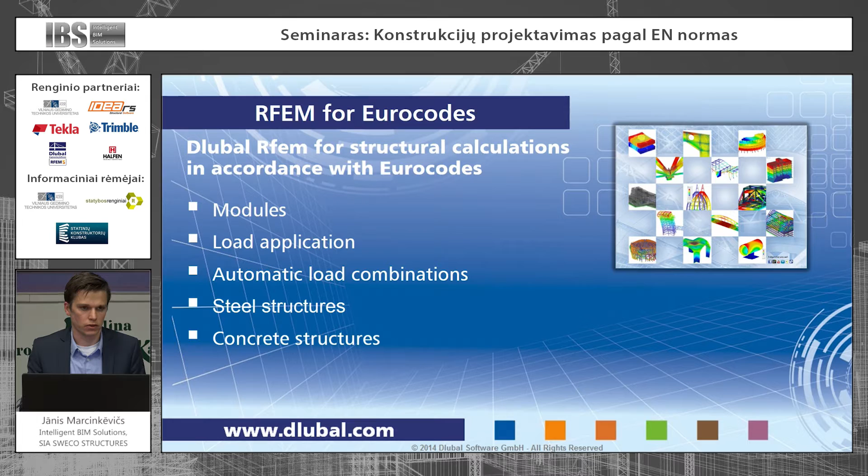So a little bit about the agenda of my presentation. I will talk a little bit about the modules available in RFEM and how we can make loads according to Eurocode, then about load combinations, then a little bit more about steel structures, and in the second half of my presentation about concrete structures.

Like many German structural softwares, RFEM is module based, so you have the main software which does finite element meshing and calculates loads and internal forces, and then you have many separate modules which deal with different kinds of materials and structures. In most of those modules, Eurocode has been implemented. Only one of the 10 main Eurocodes is not represented by a separate module in RFEM. It's masonry structures, but still, using the one for concrete structures, you can define the material masonry and do stuff like that.

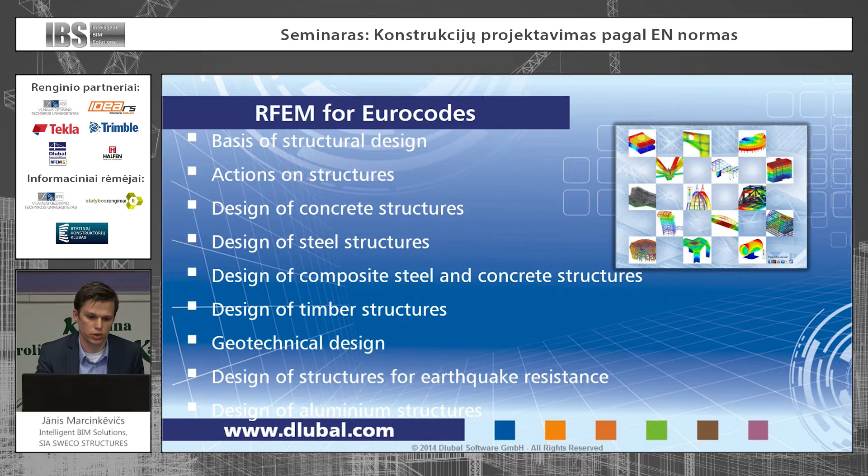And also, as you probably know, one more Eurocode for glass structures is coming quite soon. In RFEM there is already a module for glass structures, and I guess when the Eurocode is present, you can also calculate that according to Eurocode using RFEM.

About load application, RFEM has great features that can help ease up applying loads, wind loads, according to Eurocode. As you probably know, it's not that easy a task to calculate wind loads according to Eurocode. At least it takes some time if you don't have any spreadsheets made up. So by hand it takes quite a lot to do that.

What it is really great for is that once you apply this load with the generator, it stays there, and when you change the building, the height of the building, the slopes of the roof, the load is adjusted automatically. You don't have to worry about that anymore. Also, this is meant for regular buildings, but you can always use multiple instances of these generators, and by combining those you can also deal with more complex buildings.

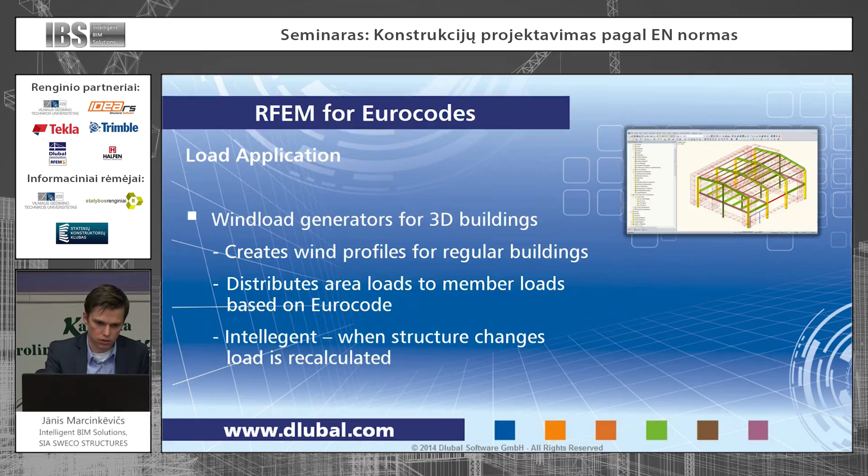So let's take a quick example. There is a cool thing that in RFEM, in most modules, there is already the Latvian national annex and Lithuanian national annex, which is not usual for those big softwares. So with this load generator, we're just showing the bottom of the building or part of the building, and the same way we show the roof

of the building. The software automatically recognizes those external surfaces and which elements lie in those surfaces, and then we, for example, can say that we want to apply loads directly only to, in this example, the columns and the top members of the trusses, but not to the wind bracings. So that goes very fast.

Okay, and what the software does is automatically calculate all the wind zones according to Eurocode, and the corresponding pressure coefficients or suction coefficients. And there is no need for any cladding where to apply the load; you can directly apply those to the members, to the bars.

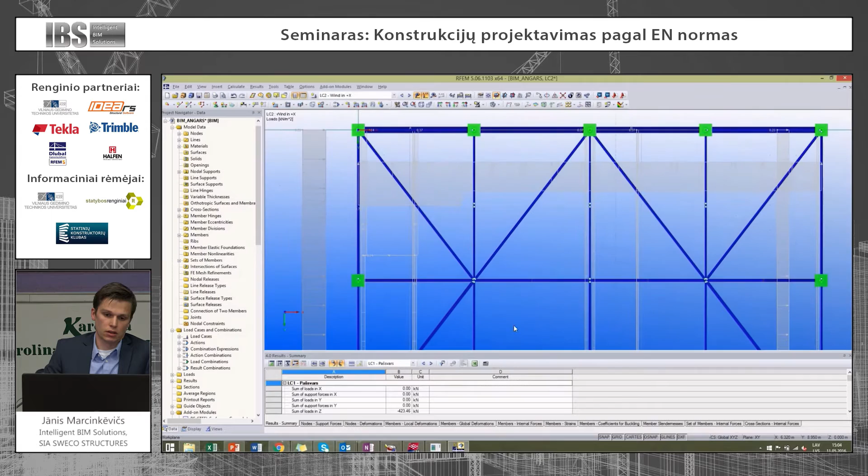And you can always check that this is applied correctly by displaying how the load is applied to separate members. So this is easy to follow up if it's correct or looks correct. So that's about the wind load.

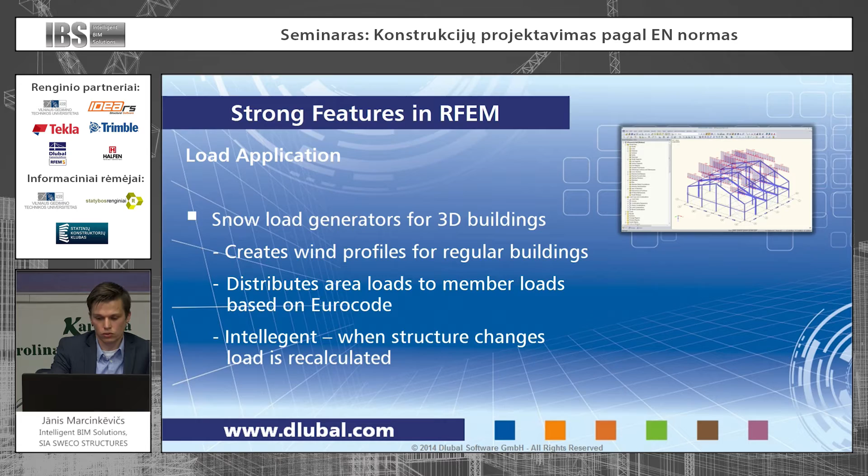A very similar load generator there is for snow load. It also includes the national annex for Lithuania. The principles are quite the same. You can choose between a flat roof and a roof with 2 slopes, but as I said, if there is a roof with many slopes, you can always combine those generators and deal with more complex situations.

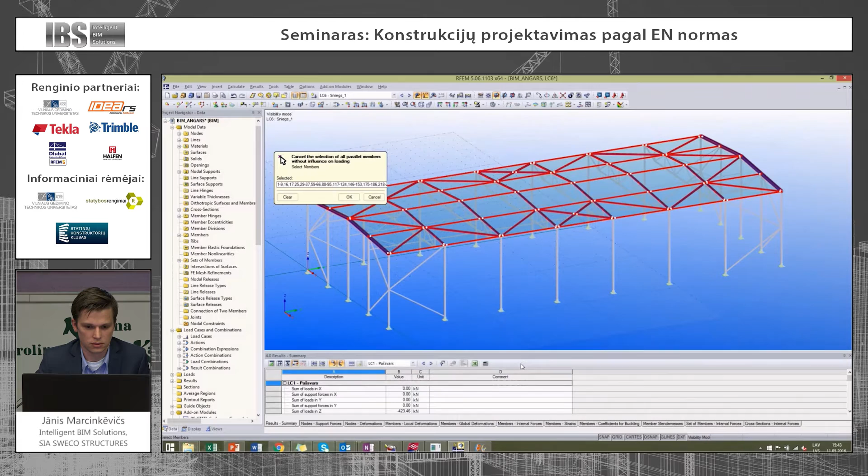There is some information from the National Annex of Lithuania. So just showing the geometry of the roof, and also telling that we want to apply load only to the trusses, not the bracings.

Okay, and then in this case, there are 3 different cases generated, where the snow load is more on one side of the roof and less on the other, and vice versa, and the third case where there's the same load on both of the slopes. All right. That's about the load generators.

Of course, you can always add those loads manually just by using point loads or line loads or area loads. And when the loads are there, what's left is load combinations. We can do those manually. There is a

sorry, there is one more load, or actually not a load, but in Europe, if we calculate structures according to Eurocode, we must consider the effect of imperfections and the forces that might arise because of those imperfections. So in RFEM, we can add those effects to separate members or the whole building. You can see it adds a deformed initial shape of the columns. So the forces that will arise because of this imperfection will be taken into account.

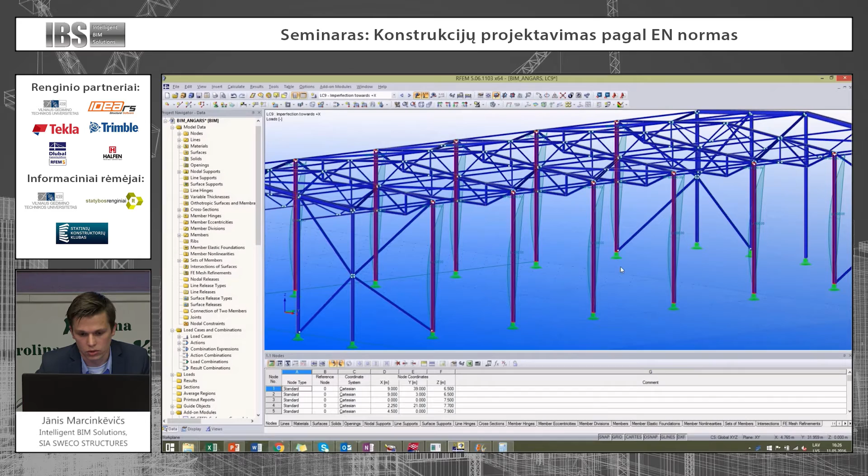And those imperfections are treated pretty much like loads. They go into the load combinations. So the last one regarding loads is load combinations. You can make those manually, or there is a possibility to choose the code, the national annex, and the software does it for us.

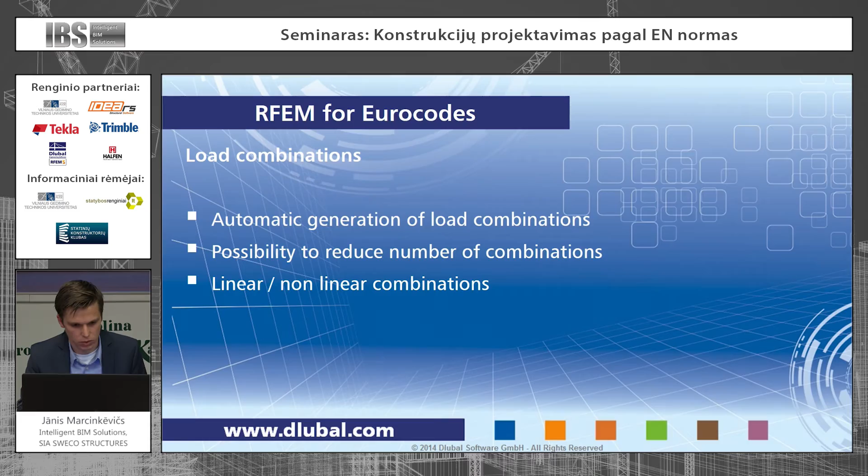And there is a possibility to reduce the number of load cases, because as you know, there are three live loads, wind loads, snow load, and the total number of possible load combinations gets quite huge, and even for very powerful computers that might be a problem. There are possibilities to reduce that number. We won't go very deep into those details. Just take a look at how those load combinations could be created automatically.

So there are some load cases. We are telling that it will be according to Eurocode. You can choose the national annex, and then there you can see the corresponding coefficients and combination coefficients as well. You can change the consequence class of the building, which also affects the load combinations. Then we tell that we want automatic combinations.

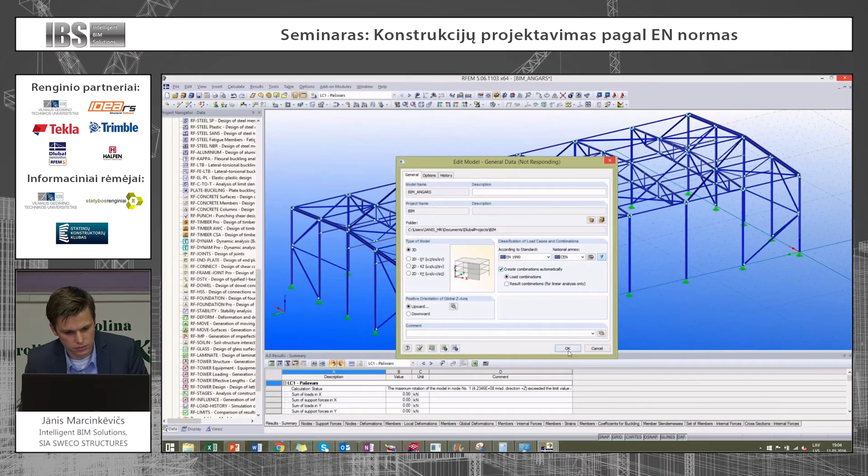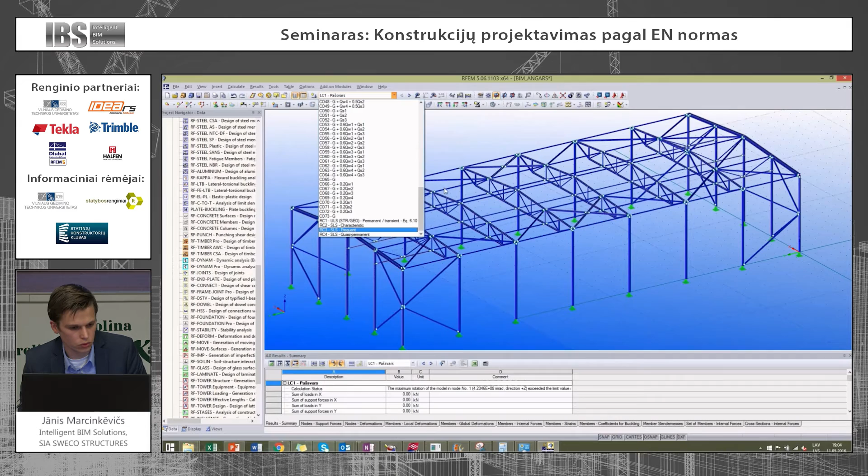So in this case, we have all we could have according to Eurocode, and after that we can go and use some tools to reduce the number if the number seems to be too big for the software or computer to handle. Okay, so

That was about the loads, and then regarding the steel structures in RFEM, there is not only one module, there are quite a few modules which allow you to deal with different perspectives of steel structures. The very basic one allows you to calculate members like columns, beams, members of trusses, and stuff like that.

What it does is automatically make the classification of the cross sections, putting everything in one of those four types, and also, which is great about RFEM, it automatically recognizes the element, what type of element it is, and makes the corresponding calculations. So by default, there should be no situation

where, for example, we have a column and we calculate it just by the axial force and don't take into account, for example, buckling. RFEM will recognize that this is a column and we should take into consideration the buckling of the column. Of course, after that you can tell the software that we do not want to check against buckling, but by default we will have pretty good results.

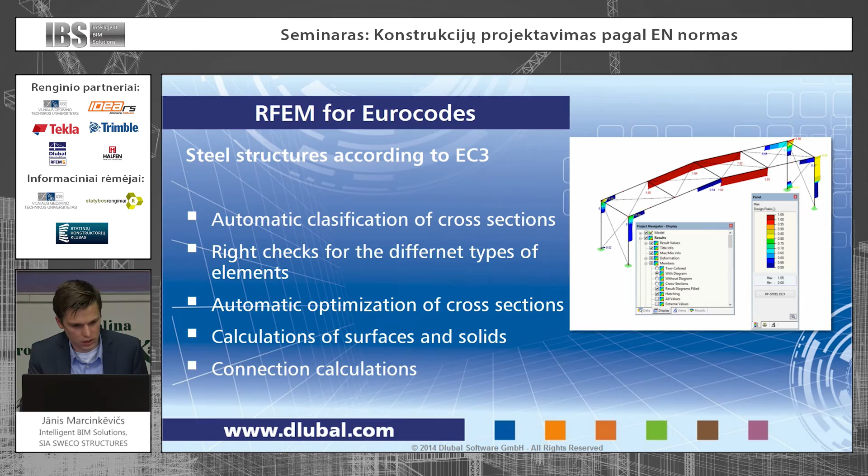As well as the connection calculations, there is quite a big library of connections. Those are all according to Eurocodes. So then let's take a quick example of how we can use this module for the members.

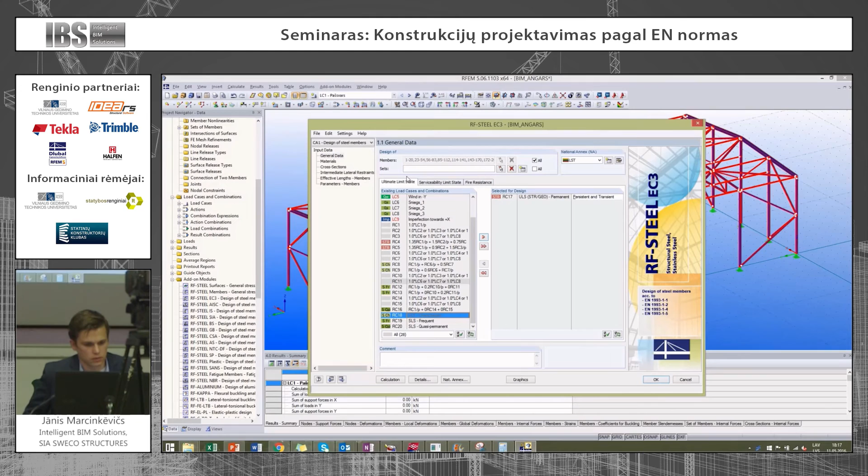So there is also the national annex of Lithuania present. Just choose the load. There's also a possibility to calculate fire resistance and do some adjusting, like adding lateral restraints, for example, for the beams, or modify the effective length, which by default is 1. You can modify that.

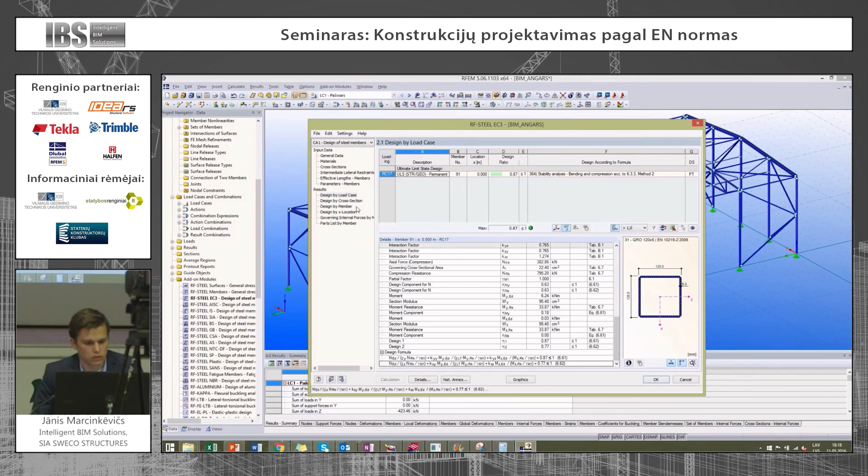So there we have results, and in RFEM, everything that's below 1 is okay, and everything that's above 1 has some problems. Then you can see all the results and all the corresponding sections from the Eurocodes. You can always find the formulas according to which that value or coefficient has been calculated, and at the end there is the final formula by which the element has been calculated.

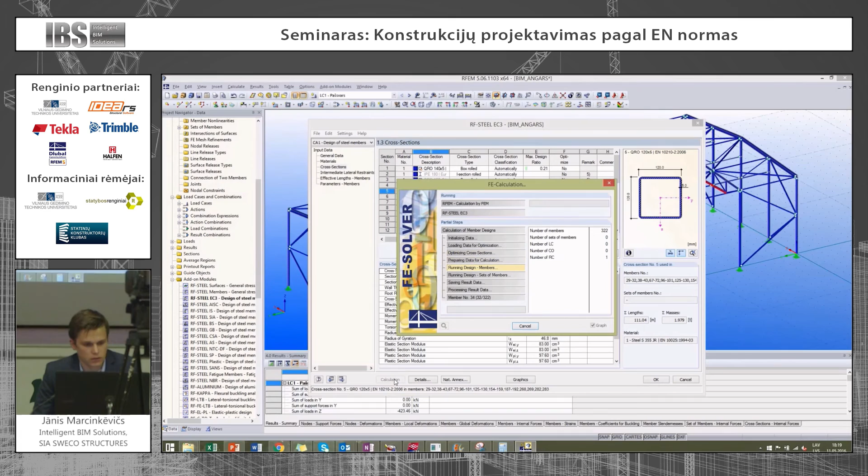As I already told, there is a possibility to optimize the cross section. Tell the software to please optimize, and the software finds the cross section that is more suitable, or with the bigger design ratio. See, there you can see how it was and what it is now. And you can see results also in the model.

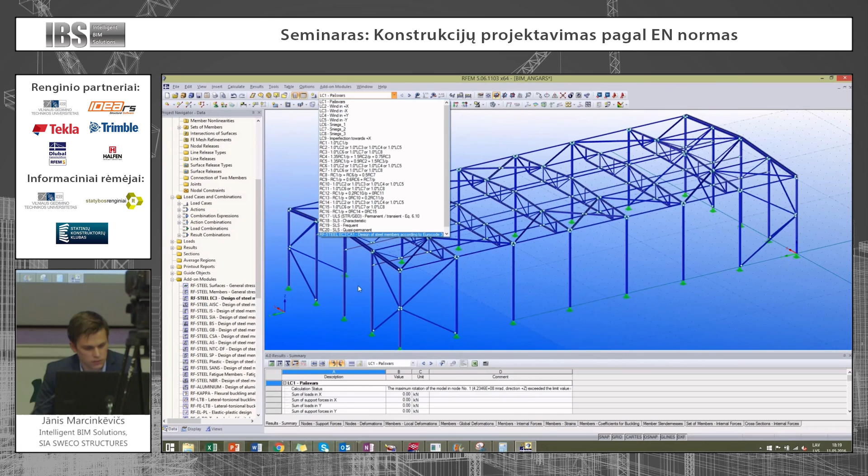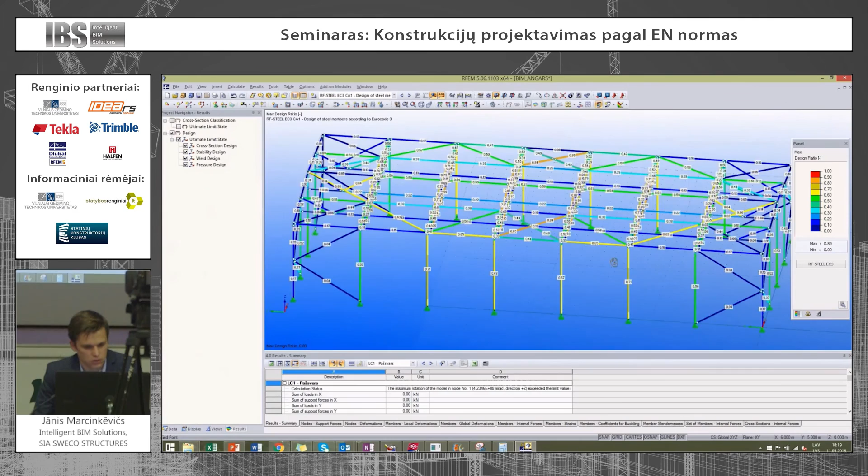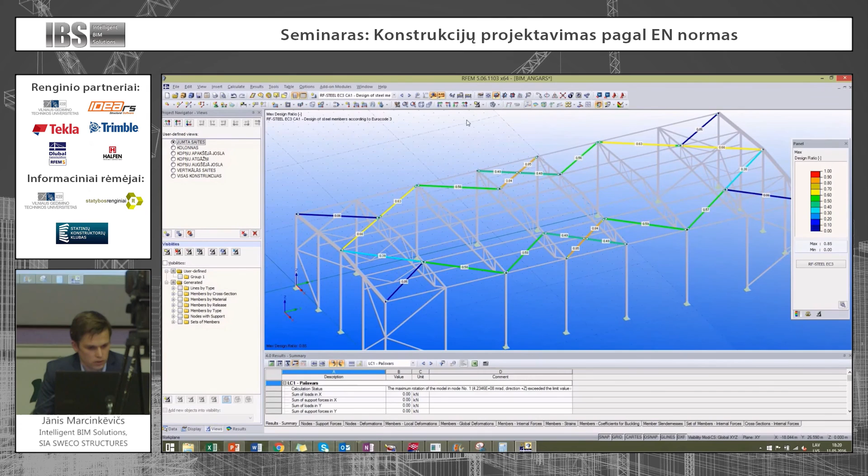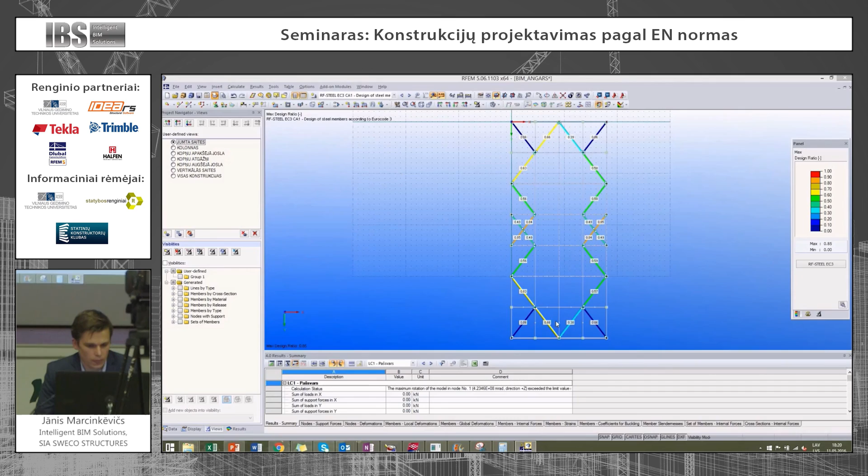So it's quite easy to find the problematic places, and a very important part of the software is the printout report. So if you need, as a result, some paper to give to the authorities, for example, you can very quickly make the necessary print screens, or not actually print screens, those pictures stay connected with the software, so if anything changes in the software, the picture will always be updated. And of course all the other results.

Okay, that was very quickly about the steel structures. I guess my time is up now.